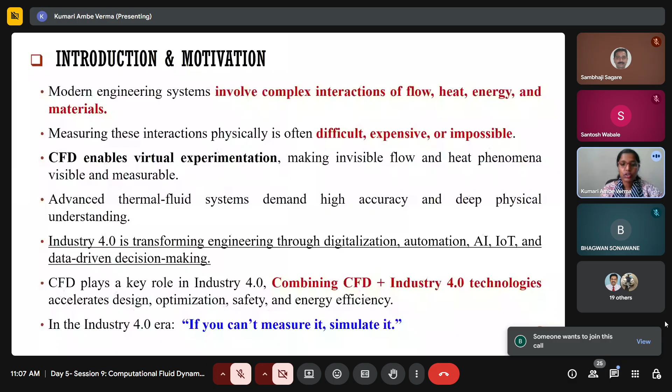So what we are doing here, we are talking about CFD, which plays a key role combined with Industry 4.0 technology that will enhance optimization, safety, and energy efficiency. So overall, one can say: if you cannot measure it, simulate it. One topic among many engineering problems is the thermal fluid system that manages heat and fluid flow.

So to overcome all these problems, there is a tool we call CFD. Many other tools are available, but CFD can be a hero for modern engineering. If you go back to the history of traditional design, earlier what we used to do was make a prototype, then analyze it and simulate it to get the result.

It was a costly and slower process. Modern engineering focuses on virtual simulation tools, making them with the help of certain software in a fast and optimized way. Nowadays people are connected with intelligent tools, nothing but AI tools, and digital twins are available. So we are now in a very fast and forward mode, combining with CFD.

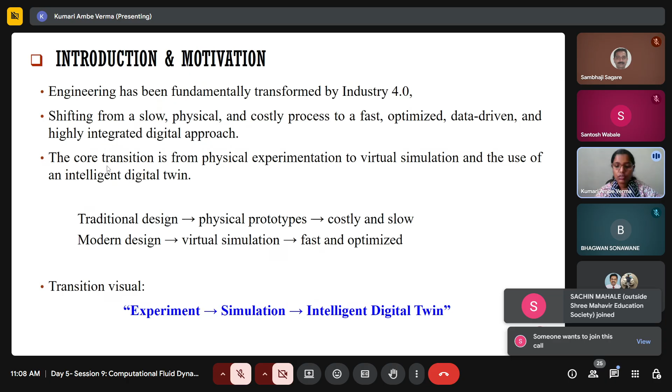We have to enhance our capacity in multiple tools, and the next coming Industry 5.0 will be all about resilience and sustainability. Still we did not reach there, that's why we are talking about Industry 4.0. So it's all about the introduction and motivation. Let's go for the little fundamentals.

It's not that complex. If you know a little mathematics, physics will be more than enough. So it is computational fluid dynamics, a branch of fluid mechanics where we use computers to simulate all the governing equations that utilize the basic fundamentals. As you know, there are three basic fundamentals.

We'll discuss that later. Before that, if you are aware of any tool that utilizes computation, it will categorize into three parts that you can see here: pre-processing, solving, and post-processing. All have different meanings. In pre-processing we always set the problem, in solving the computer plays the role, and in post-processing the interpreter visualizes the result.

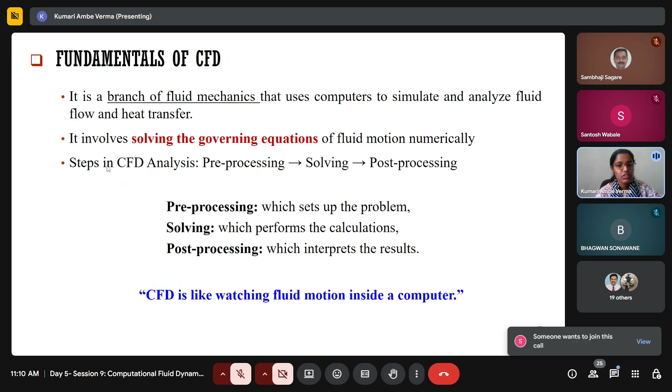So CFD is nothing but watching a fluid motion in a computer. This is a pictorial view you can understand. In the first segment we will design it, making certain changes in the geometry. We call it meshing, and then we give the initial boundary conditions and other conditions.

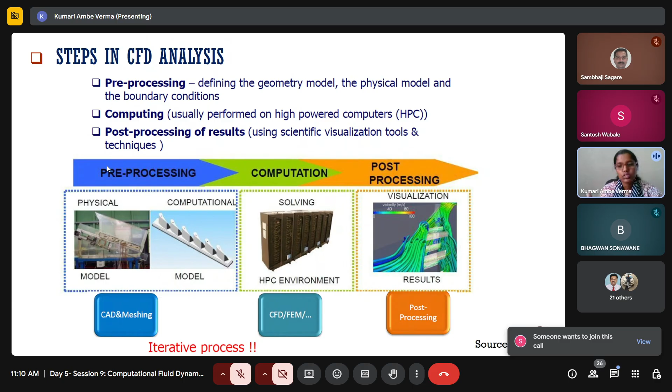In the solving part, the second in the middle, it's all about the computer part, where you tell the computer to use this equation, solve my PDEs, and then the computer will solve and give you the visualization in the result part. You can post-process with the help of multiple visualization tools.

If you see one very easy example I have taken, it is a one-fourth part of a circular disc. You can see first it talks about the build geometry, so what we will do is make one geometry form. Then in the second part we will do the meshing part.

People are aware of what is meshing, but we'll discuss these things. We call it grid generation, sometimes discretization tool. Names are different because of the meaning. So here you will do the small segment distribution.

You will do the third step: define the boundary condition and the set of domain conditions. Once you are done, we call it pre-processing. You pass the same information to the computer and say utilize this certain equation based on your demand, whether the domain is related to turbulence, combustion, multi-phase flow, or fluid structure interaction. All that condition you tell the computer, and it starts doing the calculation, converting PDEs to algebraic equations.

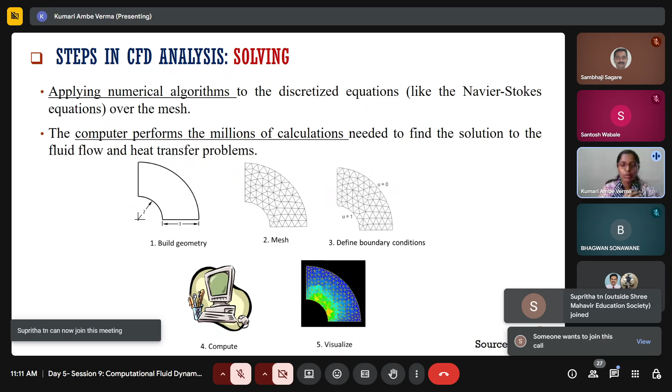Then the visualization tool is called analyzing and interpretation, so you can utilize multiple post-processing tools. This is the basic understanding of any CFD.

Now talking about aerospace, or the application, people might be curious where we can utilize CFD. There are multiple dimensions you can connect anyway. So if I talk about aerospace, starting with the aerospace segment, you can see I quoted one is DRDO HSTDV.

This is the scramjet combustor, my domain is related to that, that's why I quoted here. They are simulating it because we cannot make the high speed combustion analysis in the wind tunnel, and it is really costlier and difficult to analyze it. So we do the CFD analysis.

Now the other things: rocket, what pressure distribution is going on at a hypersonic launch vehicle, what is the wing body interaction, we call it fluid structure interaction, how it behaves in the combination of solid and fluid behavior, because at higher speed you cannot understand what is going on. It will not be normal like on land, and many more examples.

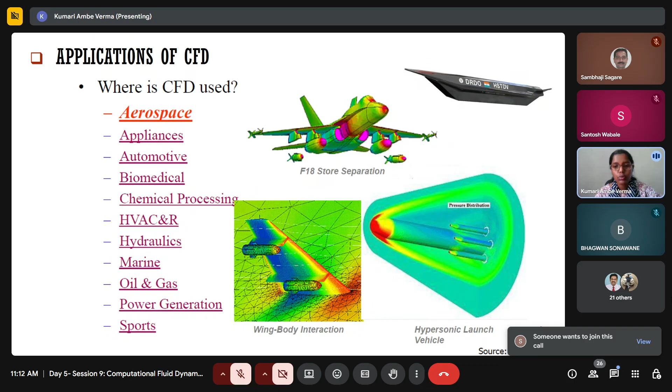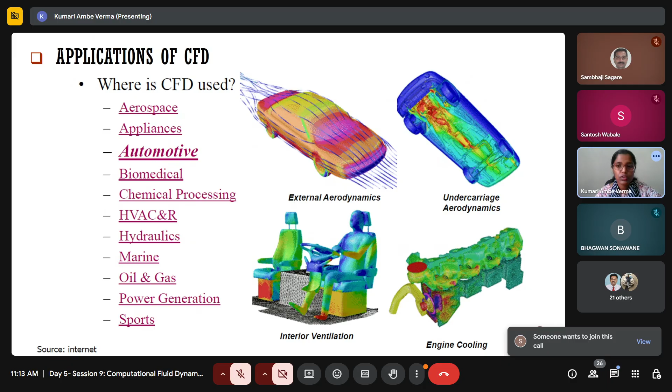Now this is more popular, automobile, people know. Automobile is a combination of internal external analysis. If you are talking about aerodynamics, the designing part, it's a different section. If you are looking for engine cooling, it is a different analysis. Similarly, interior ventilation is also one task, so that the driver or the people will feel comfortable while driving. So this also you can analyze here.

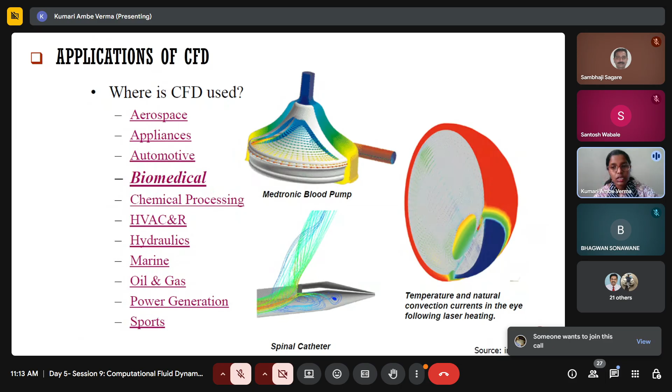Now talking about biomedical, people don't know, but mechanical engineering people always invest in biomedical. They focus on heat dissipation, cancer growth, everything we can analyze with this software. You can see one example, temperature natural convection. This is the eye cataract, where laser heating can change the behavior, can disrupt our eyes.

That also we can analyze in this CFD tools. And chemical processing, like how mixing will happen, what twin screw extruder we should utilize, what modes of flow we should take. These are all about chemical processing.

Go for HVAC, you are more aware nowadays. People are more looking for air condition, how you will keep it, what would be the size of the volume, how the duct will be designed so that efficiency will be higher, there would be lesser loss, because we engineers always focus on reducing the error, whatever the inefficient part, try to get 100% efficiency.

And hydraulic, it is really good example, because you can see there is a bridge where both side fluids are available, but there is one catch here. You can see the air also plays a role in designing this part. You cannot ignore the air, wind speed, and any disaster situation. So it's not only the one bridge standing in the middle of the water, or whatever the dam is, in the middle of the water streams. It's really difficult to simulate. For that also multiple categories we have defined.

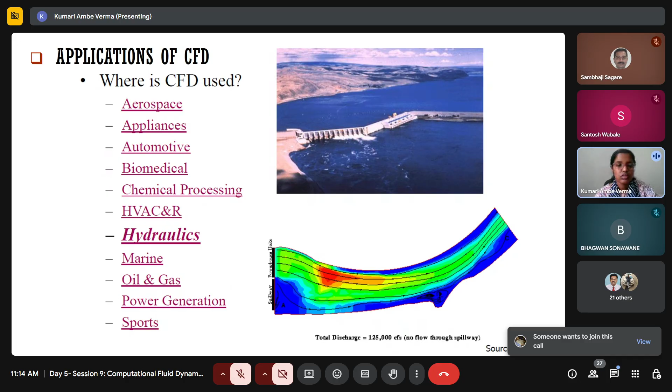Now marine is really big now. Ship hull is what people are working on, the front head, how to design it so that the drag will be minimal and the speed will be higher.

Similarly for oil and gas, you can see how you can make it possible, whatever pipeline you are talking about, how the flow vectors and pressure distribution work on the offshore oil rig. This category also goes for mining people. They make a drill in such a way that the life of the drill bit will be higher and it will be efficient also.

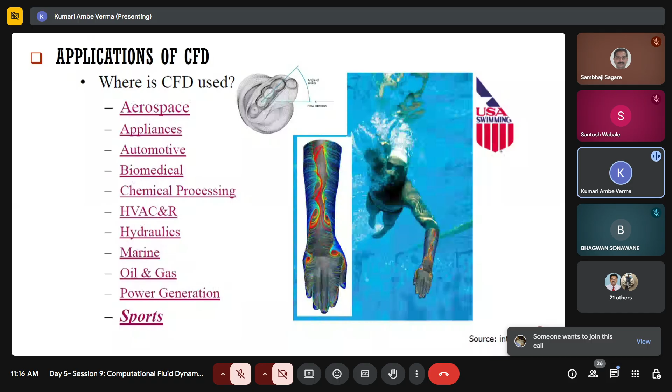So you can see here the understanding of the thermal fluid system. Now we are planning to talk about introduction and fundamentals of CFD, all about how the application will work, what are the domains, what are the three major sections: pre-processing, solving, post-processing. Now let's go for a little mathematics and physics.

As you know, any basic thermal fluid system definitely will take three major directions. First would definitely be the mass, second would be momentum, and third is energy. All are aware of this.

So we always talk about mass is conserved, momentum is conserved, and energy is conserved. In momentum, Newton's second law is the major thing, where the force will distribute it, whether it's pressure force, weight force, whatever type of force we are talking about. So all the fundamental physical equations will help us understand, then we choose our problem and add the additional equations we need, then we give it to the system. The system will simulate my problem.

Now, being a mechanical engineer or engineer, you must be aware of these two words, Eulerian and Lagrangian approach. This is all about how you analyze the problem, whether you are standing and the flow is passing, or the second condition, you are passing with the flow stream. So these are two major approaches, Eulerian and Lagrangian, where we can say the particle is standing or traveling with the fluid motion.

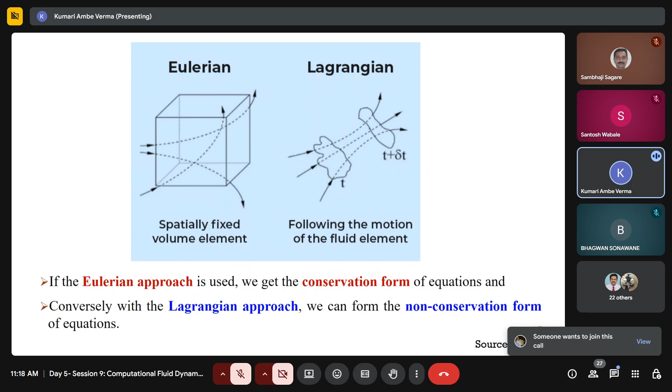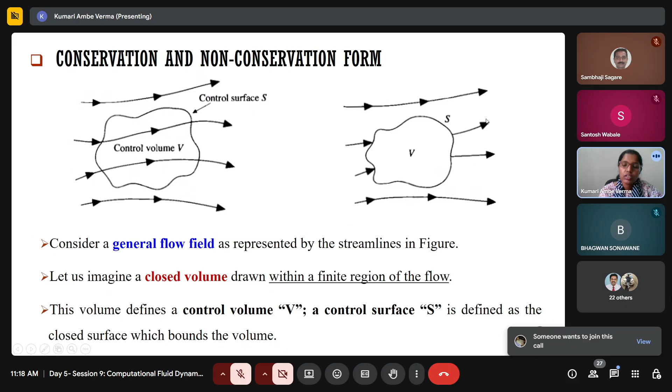In CFD, we call it conservation form and non-conservation form. We never say Eulerian and Lagrangian. We say the control volume term, we say the control surface term, where the picture directly shows you: in the control volume, it is fixed and the streams are flowing. We call this conservational. Here you can see the particle is moving through the streamline, whatever that streamline is - it can be heat flow, fluid flow, anything. So this is all about conservational and non-conservational.

Here we never say Eulerian approach and Lagrangian. People talk about the fluid particle trace and the control volume trace. So here we'll say: the flow model which is fixed in space is conservational form. The flow model moving in space, we say non-conservational form. This is a keyword you must know while doing the analysis.

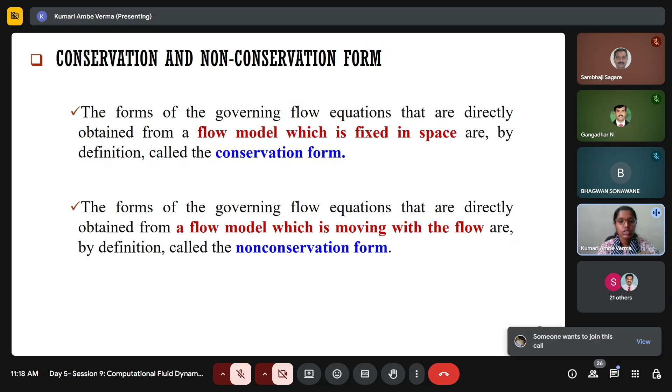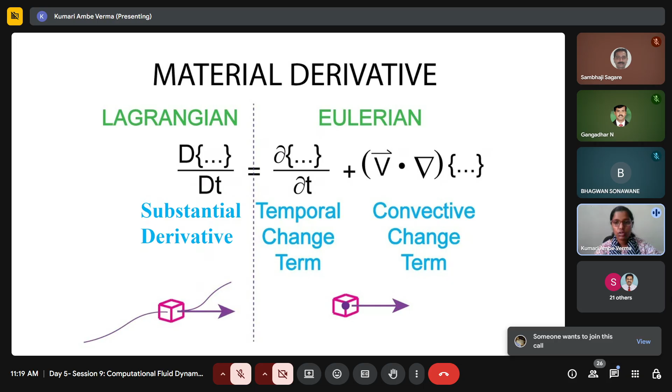And now people will ask how we can connect both. So there is the material derivative already available in mathematics that connects the Lagrangian and Eulerian together. In Lagrangian, we utilize the substantial derivative, and in Eulerian, the temporal change and convective change terms are involved. And you can understand it through the picture - all these pictures I have taken from the internet, it was easy to understand.

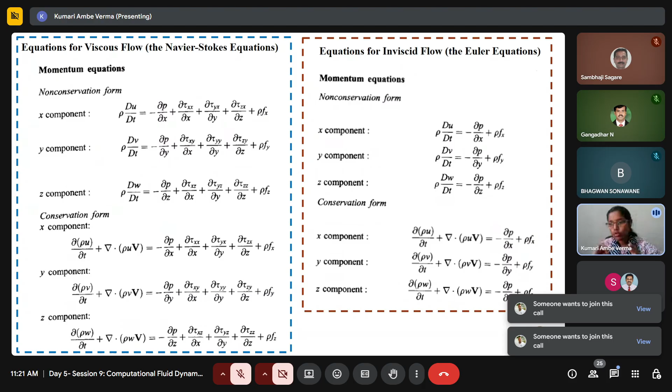Similarly, you can see the non-conservational form on top. These three equations utilize the material derivative in combination of both. So there is no difference in the mathematics - it's about how you represent it, whether you are tracking the particle with the flow or you are fixed and watching the thing. It's all about: you are in the boat, and the boat is flowing in the water stream, versus you are standing at the bridge and looking at the particles. So it is like in this way.

Similarly, for the energy equation also, there is the inviscid and viscous flow, where you have seen one term - E and V squared by 2. Energy can be in any form.

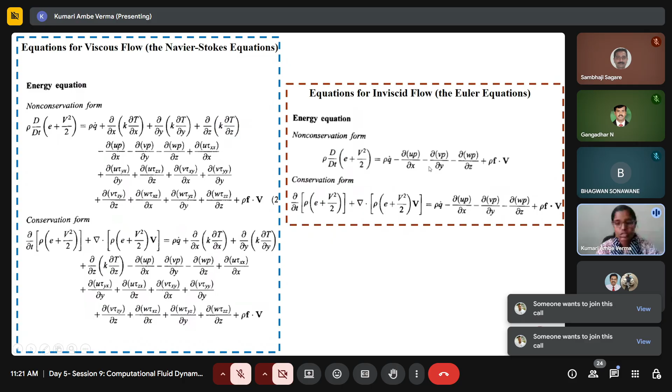In the fluid thermal system, we focus on internal energy and kinetic energy, and these terms are segregated. All the internal generation and effects are on the right side, so this is conservation, non-conservation, and conservation form. One catch: it's inviscid, so you will not see any tau or stress term in the equation. This is the basic equation you must understand before heading into CFD. If someone tells you the governing equation, we call it the fundamental principle: mass is conserved, Newton's second law means momentum is conserved, and energy is conserved, where all terms are important.

To use this equation, you cannot give it to the computer immediately; you have to give it in a discretized form. Why discretized? Take an example of a room where you want to calculate the temperature at the middle. How would you calculate it if you're given only two boundaries? So we create multiple imaginary boundaries and small segment parts, called a discretized form, so we can understand each and every location. The equation will be calculated without jumping, so you can calculate each and every place. So in CFD, it is the art of replacing the PDE with an equation in discretized algebraic form.

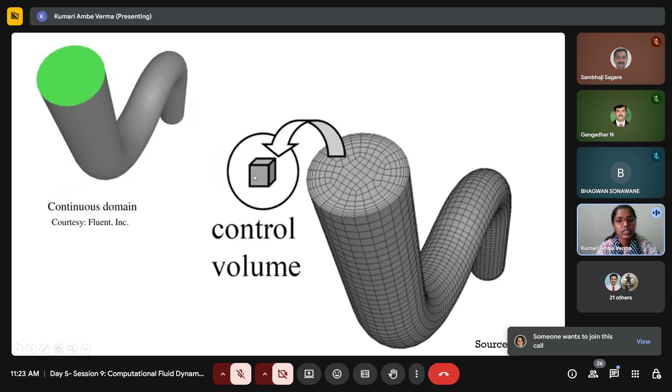If you imagine a pipe flow, this is a normal continuous domain. You try to make it into small segments, which we call a control volume. In this control volume, we give all the governing equations, and that will pass the information to nearby volumes, and it will reach the end of the domain. Then it will give you the final outcome.

One thing you must be clear about: whenever you use any CFD tool, it will definitely give you a result, but it's not always true that you are getting a correct result. For that, you must understand whether you have coded all the data properly or not.

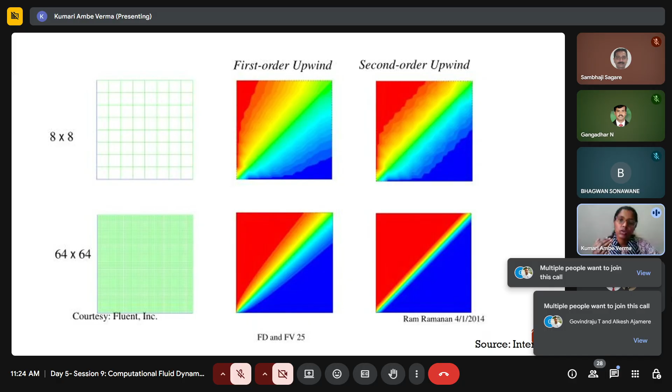So you can see the difference just by increasing the grid; you can see different kinds of results. So which one is correct? How would you analyze it? By the discretization methods and the validation part.

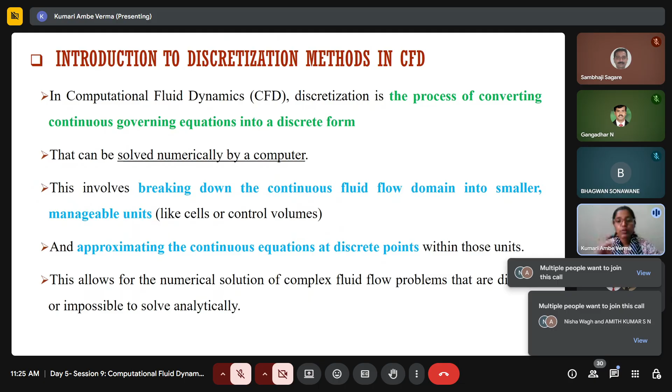So what is the need of discretization? It deals with converting the PDE to a discretized form that the computer will solve, and then you can transform this PDE and also apply multiple stability techniques, which we'll discuss.

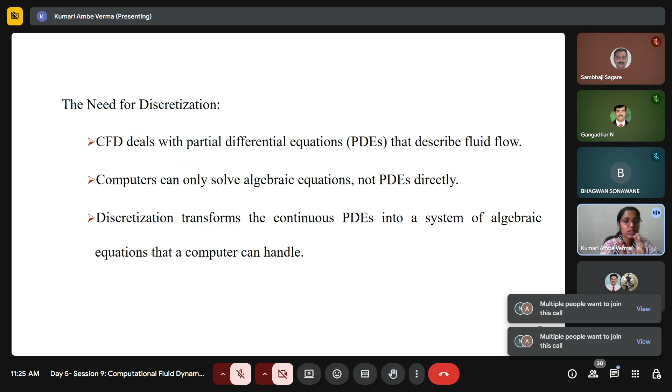So now you can see, you're thinking about some equations, some problem — that's all about the analytical equation. You make it into a discretization form, and then the problem will be solved by the computer. So discretization can be of three types: either finite difference method, finite element method, or finite volume method. How would we decide these things?

Based on your problem statement, whether you are talking about composite material, combustion, high speed, or thermal related issues, you have to decide the problem, then choose the discretization technique. This discretization technique will pass information to nearby elements. So how would you decide?

What you will do is discretize into multiple segments so that you get nodes and corners available. Once you ask the computer to give you this node at this point, it will give you the intermediate result, which is not possible in a real world experiment. You cannot predict what is going on, how the combustion has flowed, how the blast has happened.

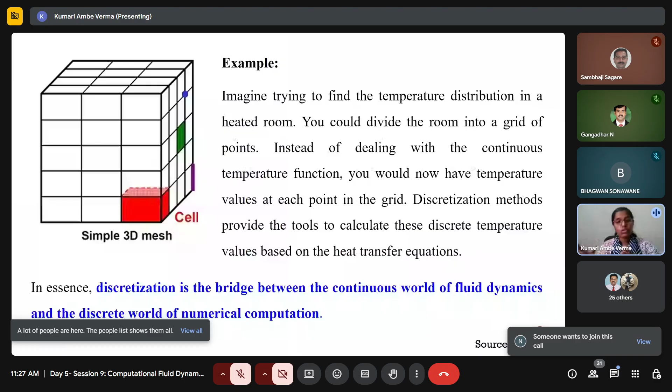Recently the Ahmedabad blast happened, and no one can understand it fully. They will simulate the same situation, trigger it, and try to get information on what was the cause of the problem. So this is all about discretization. How would you discretize? That will bridge the gap between the continuous world and the discretized world, making it into a singular, small segment.

So here there are three modes we can use: FDM, finite difference method; finite volume method; and finite element method. In all these cases, you use them to approximate the solution.

So how would you do it? In all cases there would be a control volume. You define it, then analyze it. If I'm talking about finite difference, people always choose it when they are more focused on the approximate solution related to difference approximation or a structured way, like any simpler structure, you can go with finite difference.

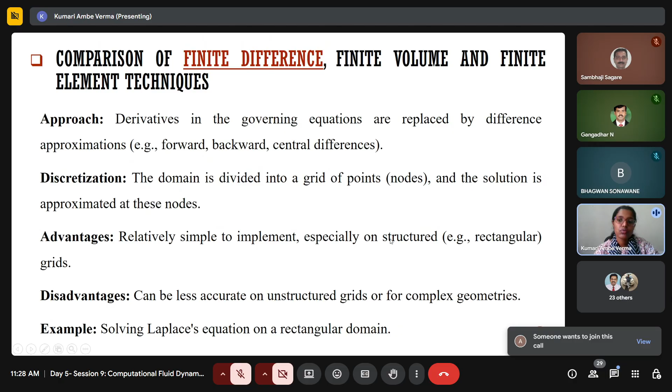Now if I'm talking about finite volume, it is really popular. Here we can solve any kind of domain, small region domains very easily, mostly fluid flow and heat transfer simulation problems. So FVM is really my favorite because I have worked on it.

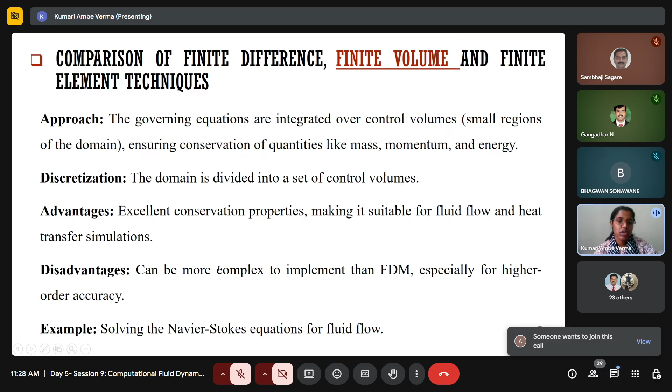Now if we compare with finite difference, finite volume is somewhat related but really complex and time consuming, though it gives a really good result. Approximate accuracy will be really good compared to others, and it solves simultaneous equations also.

Now the last is finite element technique. Here we define all the domain, but it always handles complex geometries or where mesh densities are really important, so it is really expensive but gives a really good result. Mostly people working on analyzing stresses and strain in mechanical structures use finite element. In ANSYS Fluent also you will see one domain called mechanical, where they made a separate section for the finite element technique.

So till now we were talking about discretization, why we give a small segment to solve the problem, but no one has talked about what type of division we should do. It's not always possible that you get a rectangular form of a very small, simple structure. It may be abrupt also.

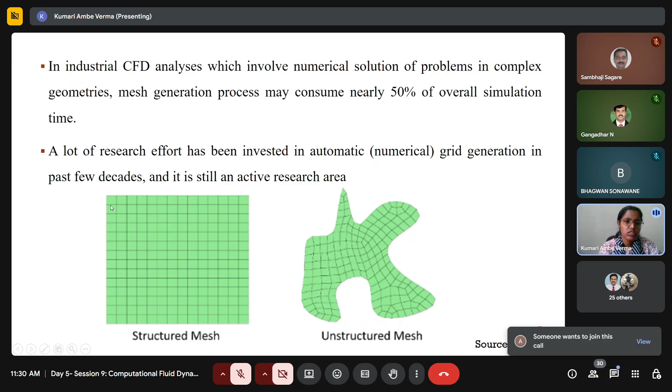Structured mesh will look really finer. You can see the difference between structured and unstructured; an abrupt example I have given. So grid can be structured or unstructured, and many more divisions are available.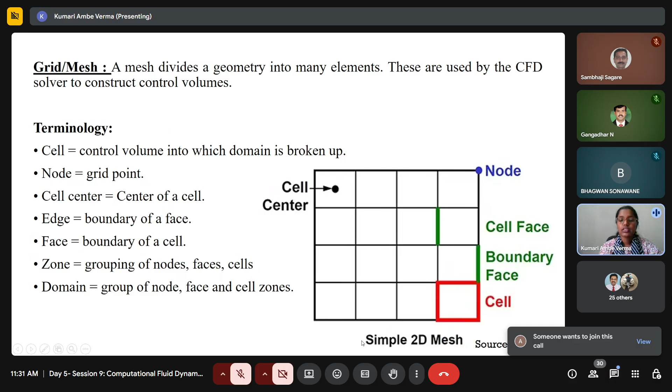Now talking about 3D, the cell will look like this rectangular form. Here you will experience one extra word, that is edge, and the face boundary will be in 2D. You can see the nodes are here, these are the cells, this would be the cell center.

So you must understand the terminology, because while passing the information, whether you are keeping your equation at the cell, at the edges, the cell vertices, or whether it is passing staggered, this will change based on the selection of FVM, FDM, and FEM. How you are choosing will change everything.

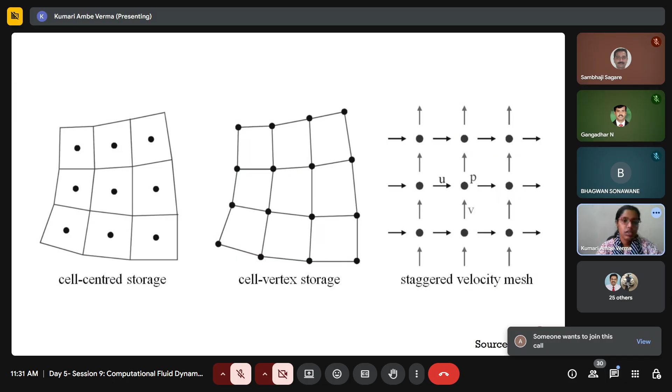So if someone will ask what points we should consider while doing the meshing, you should focus on the resolution. Don't go for unnecessary complex meshing, whatever is needed, do it. Use types of mesh based on your application, and always go with your computer resources. Based on the software license and computer resources only, you can do it.

So for 3D and 2D type meshes, it cannot always be quadrilateral and hexahedral. It can be tetrahedral, pyramid, triangle, prism, any arbitrary shape. Polyhedral also can be a mesh type, that grid type that you have to decide.

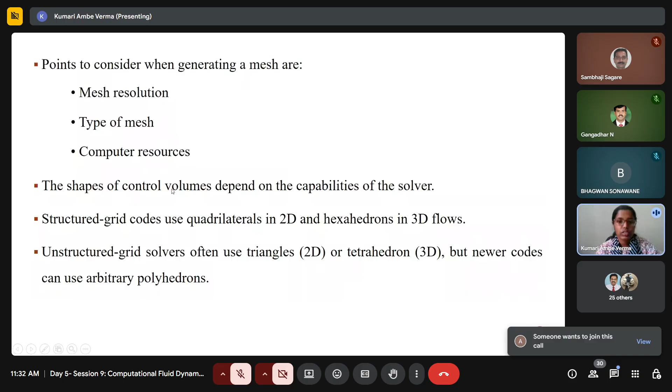Imagine I am standing here passing information to this straight 2D geometry, you can understand. Now imagine we have one grid here, and nearer to this grid suddenly I got a prism. What will happen? The center of the cell is here, and here the center will change, and information will be compromised. So that will create an error.

That is really important. That's why multiple engineers only work on the meshing part. There are separate sections for geometry generation, separate sections industry always focuses on mesh generation, because that will change the outcome or the result.

So types of grid: starting with structured, unstructured, and certain block structures also, and certain specific aligned flow structures are available. If I say the structured grid, it is also having multiple segments.

So excuse me, slides are changing.

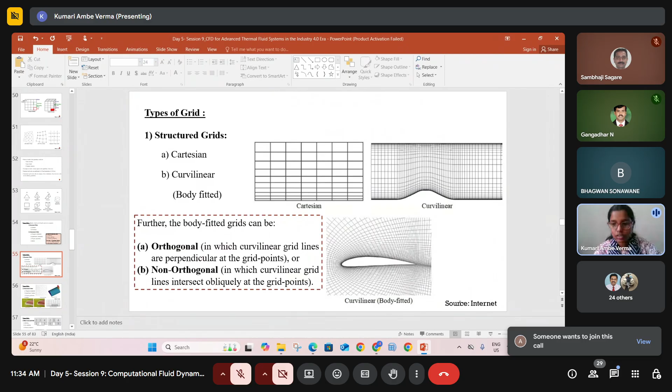Am I audible? Hello, yes ma'am, you are audible. Okay, the slides are changing or stuck, I cannot move it now. I think it's stuck. Can you stop sharing my screen? I cannot do this part, there is an issue, I'm so sorry for this. Can you see the screen now? Yes ma'am, okay, sorry for the interruption, I'll share again.

So let's go for the types of structure. Starting with the structured grid, it will have two major components: it may be Cartesian, it may be curvilinear.

The curvilinear is all about the body fitted. Whatever structure the body has, we will focus on that, and then we will refine the structure. It will not be Cartesian, it may change the shape.

Similarly, these are the most popular curvilinear examples. This wing you always simulate in the system. So that can be divided, it also comes under the structured grid.

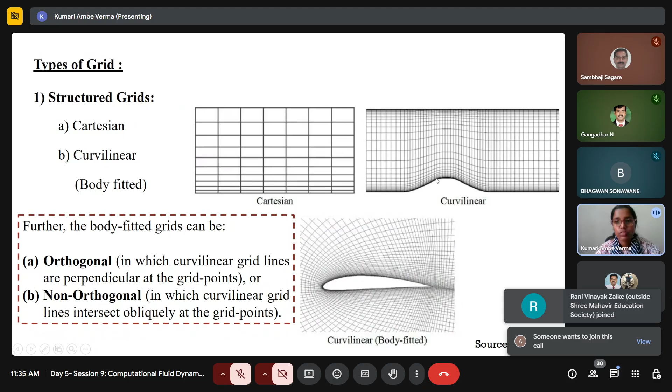So you can change the meshing wherever the target area is. If imagine I am focusing on that part, why would I invest energy and cost of the simulation elsewhere? So make it accordingly, whatever the domain demands.

Now go for the unstructured. It can be arbitrary, you can say polyhedral, tetrahedral, hybrid, anything.

Whatever the domain or demand is, whenever you see the joints, it is really important to focus on whether the information will be passed properly or not. That can be triangular, quadrilateral, polygon, or hybrid. You can choose any, and this is really important.

This block structure that people nowadays use divides the geometry with an imaginary line. What does that mean? Imagine my focused area is the 1, 3, and 5 number regions. I'll not refine the 2 and 4 sections, I'll only refine the first, third, and fifth sections. That can be done with the broad block structure, again matching, non-matching, and chimera, which is all about the composite combination of all. So these are the types of structure you must know.

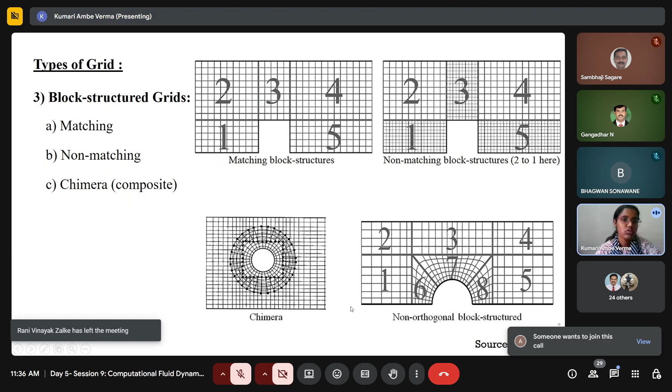What we have done here is make a geometry, then create a small meshing or grid generation to give the proper information to the grids, which can be utilized with the discretization technique, either FVM (finite volume), finite element, or finite difference method.

Now you know your boundary condition, whether you are working for high speed flow, combustion, or only turbulence, or extremely low speed flow where the Reynolds number is really low. These are the initial conditions you will define to the computer.

Now imagine you are ready with these three. What about the computer? How can the computer solve multiple equations, like three governing equations plus any additional equations you have given? For that, you have to give a command to the computer about which kind of numerical scheme you want to utilize. Like in second year mathematics, we already studied the Runge-Kutta method or Gauss elimination, and many more methods are available. So now we'll talk about the available solver that will solve all the PDEs, converting them into algebraic equations that are discretized by any method.

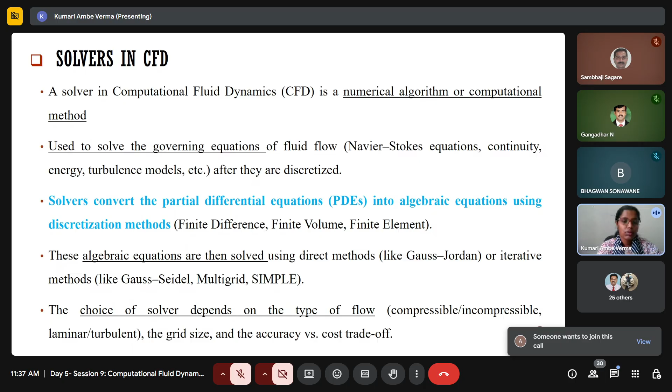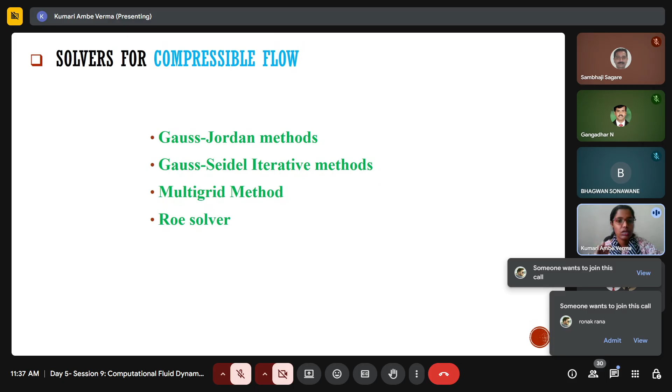There are multiple small segments you must understand here. If I talk about two cases only, compressible and incompressible. For compressible, I have quoted four: Gauss Jordan, Gauss-Seidel, multigrid, and Roe solver. Based on your demand, you will choose one.

Now imagine you are choosing the Gauss Jordan method. It is a direct numerical method, not iterative. What you can do is perform elementary row operations. You will create a matrix, solve it, and get the linear algebraic equation. Then you will solve it with the row and column augmented matrix method. It's a really easy Gauss Jordan method.

Now go for the iterative method. This is the Seidel method. It will give an iterative solution for the same linear equation and try to reach up to the exact solution. Not possible, but we'll try to reduce the error percentage.

Now if you are talking about the multigrid method, why should we choose multigrid if all the iterative methods are available? Because it is very good for convergence. Convergence means you have taken three equations and are solving them together. It should always be within a certain error percentage, it cannot be beyond this high frequency error. You have to define how much error you will accept. Like industry or researchers always go for 5% maximum error percentage. That convergence is really important, and it would be rapid because of their solution technique.

Now the Roe solver is really popular. These two are really popular in compressible flow. This captures the shock and discontinuities also, so it is also an approximate solution.

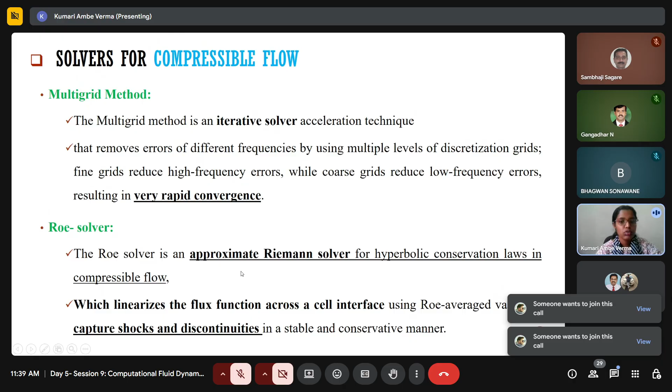Now talking about incompressible flow, most bachelor students focus on the simple algorithm and the vorticity stream function formulation. Why? Because in the iterative method, we always couple velocity and pressure. The simple algorithm couples the pressure and velocity, and then we formulate and solve it. Because of that, if the point is focused on velocity, the pressure variation will also affect the velocity. So that can be satisfied only by the simple algorithm. It is very good for incompressible flow. You can go for compressible also, but you have to focus on other criteria.

The vorticity stream function is also one mathematical approach. You focus more on the vorticities, the small curl of velocity you always see in the domain, that is the function. So the selection of the solver will change the result. It's a simple example: you know the pathway to reach from your company to your home, or from your institute to your home.

There are multiple paths you can utilize, but you have to choose the optimum one where you can reach faster, less costly, and give a proper efficient result. This is nothing but the selection of the solver who will try to convert the PDE into the algebraic equation with less error percentage.

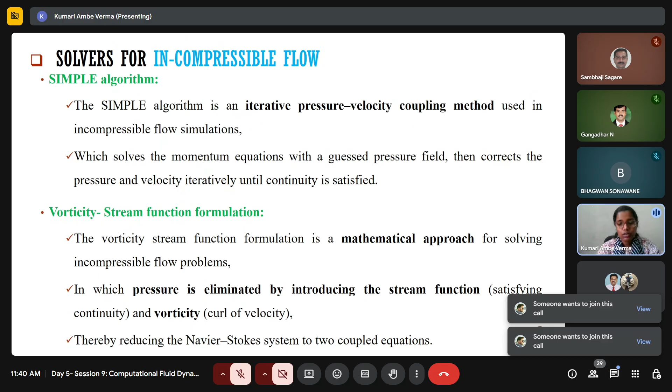So what we have done: we made a physical element, did certain grid generation and mathematical modeling, then converted it into an algebraic equation and got the numerical solution. Once we compared with the analytical solution, there was an error, and that error we have to justify with the comparison chart, which we call the validation part. It should not be beyond 5%.

So how can we reduce this error percentage? There are multiple ways. If you are standing here taking information from nearby points and passing the information, it can be in both modes. Two modes are available: either the explicit mode or the implicit mode. Both will solve the problem.

In the software you'll see a section where you choose whether you want the explicit approach or the implicit approach. If you choose explicit, and you're planning to get the information for point 3, you take the information from the back end, the 2 to 4 line. These are the known data you utilize for one unknown data, and you do it one by one. There is no simultaneous information passing by the system.

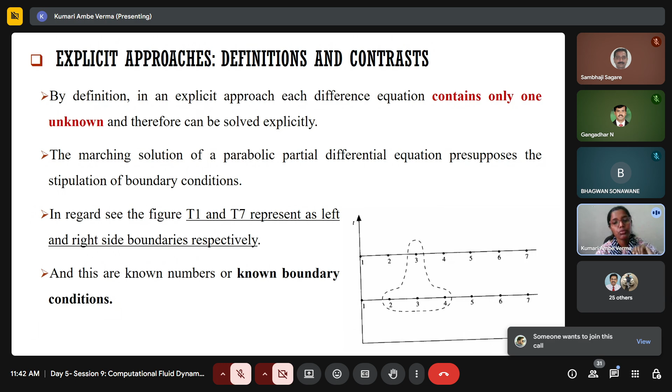But if you talk about implicit, and you plan to calculate point 3, you take the information from the backside, but simultaneously you also give information to 2 and 4. So its unknown must be obtained by means of a simultaneous solution. In the earlier explicit case, you contain only one unknown and three known parameters. So you choose the approach, whether explicit or implicit, based on how the information will be passed. This is one more section.

Now, how would you do the comparison? This result I have taken from my paper. Imagine you have one geometry, you discretize it, and you make a plot — take an example of a pressure plot at the wall. You can see the black colored dots; these are the experimental data. The multiple colored data are other kinds of models — these are the models I told you that you will choose.

What is the target domain? There are multiple meshing categories available. Based on your domain, you can refine the meshing further — so do a rough meshing like this and go further. This is one way. Validation is really important in any research or academia; people must understand this part.

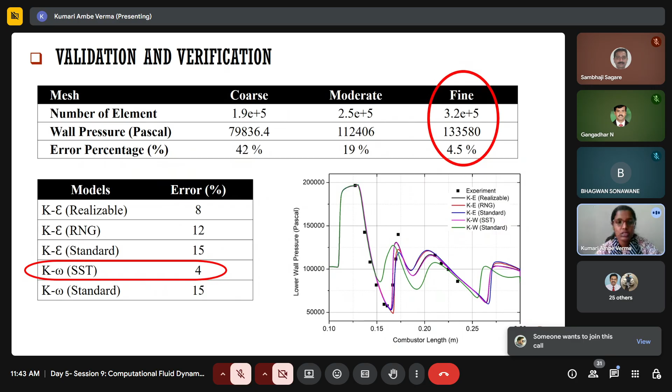So now we are done with understanding the thermal fluid system. Now we'll talk about how to do advanced analysis with CFD. Nowadays in any thermal fluid system, we always say fluid is flowing, heat transfer, heat dissipation — but the real challenge as an engineer is turbulence, which we cannot capture properly, either experimentally or via simulation. So what we will do is try to understand this chaotic, three-dimensional, wide-range length and time scale phenomenon.

There are DNS software and multiple software techniques available, but these are not needed right now, because first you should understand the mathematical representation — which technique to choose — because when you open the software, you'll be confused. There are multiple options for turbulence modeling: Reynolds time-averaged conservation equations, maybe the Boussinesq approximation, maybe two-equation models like k-epsilon or k-omega. People go directly with k-epsilon or k-omega without thinking about the basics. So this is all about turbulence — how to choose the model based on the classification of the problem.

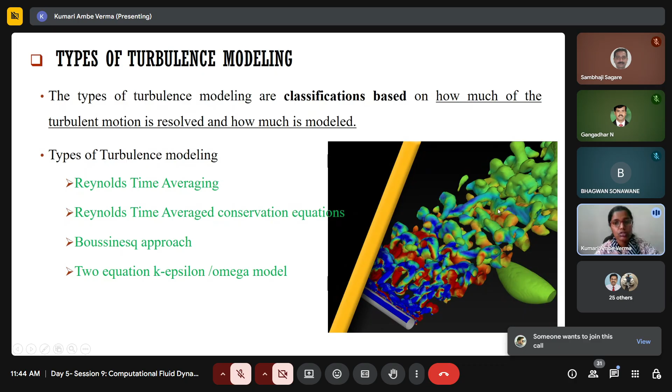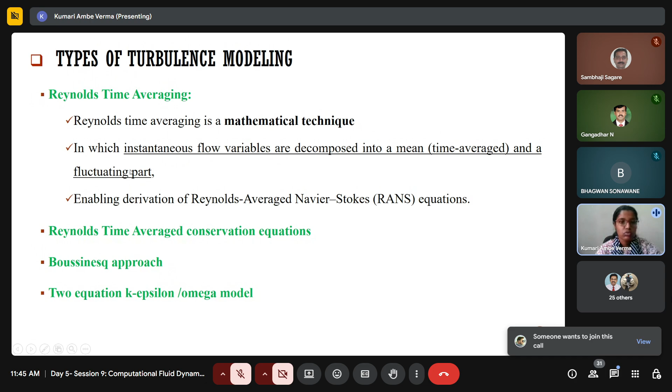If you are choosing the Reynolds time average, you must say I am only focusing on the mean, that is time average of the fluctuating part, the vortices. If you are choosing the Reynolds time average with the conservation equation, that means you are more focused on the Reynolds stresses also. So what are the points you wanted to trigger in your simulation? You have to choose accordingly.

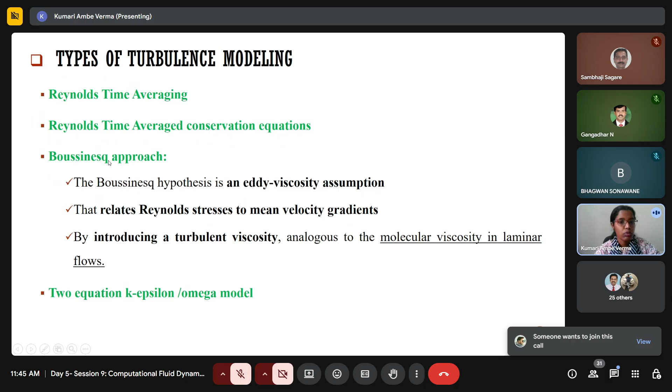Now the two equation models, K-epsilon and K-omega, are really popular to capture the eddy viscosity, because you are incorporating the kinetic energy and dissipation energy terms extra to the computation, and that we will solve. You already feed three equations: mass, momentum, energy. Further equations you add based on your application, like for combustion you add the species equation. Now if you are more focused on the eddy, you add two more equations. So in total you have five equations that will solve for one particular point, and then pass on to get the final result. So it is costly, you can say time consuming. Choose your modeling accordingly.

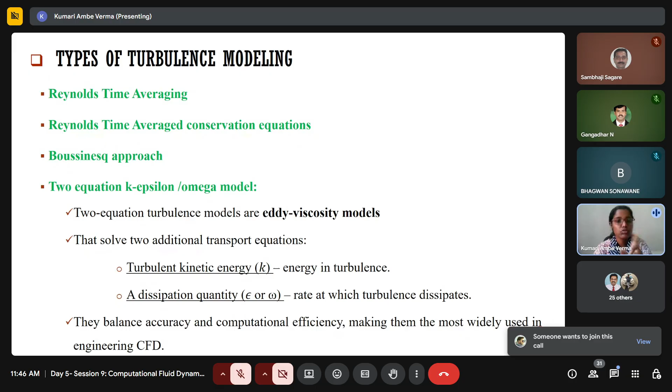Now let's talk about few tools. People ask, when should I go for ANSYS, when should I go for MATLAB, when should I go for COMSOL Multiphysics? If you are working on FEM, go for these platforms: Abaqus, SolidWorks Simulation, Nastran, and SimScale which is nowadays really popular. You can use these things.

Now if you are more focused on flow analysis, definitely go for OpenFOAM. This is open source software, you can use it without any licensing, but it is difficult to solve because it has its own library you have to trigger. Now ANSYS Fluent is really user friendly. SimScale is also popular in FEM.

Now talking about FDM, people make their own codes and take data from certain libraries, and MATLAB is really popular for this. Many more softwares are available, you can choose whatever you want. Only the display and UI will change, the interface will change, but the basics remain the same. You have to focus on pre-processing, solving, and post-processing.

So now talking about this CFD advanced analysis, I have taken only one equation, that is turbulent. Now let's go for CFD meeting industries, how people are more focused here, like CFD studies and real world applications.

Now take one case study: electric vehicle battery cooling. Nowadays people are more focused on this because of overheating as well as safety and efficiency issues. So which approach you will utilize, and why, whether you are focusing on the velocity or flow field, or on the coolant channel, what are the domains - do it and then analyze it.

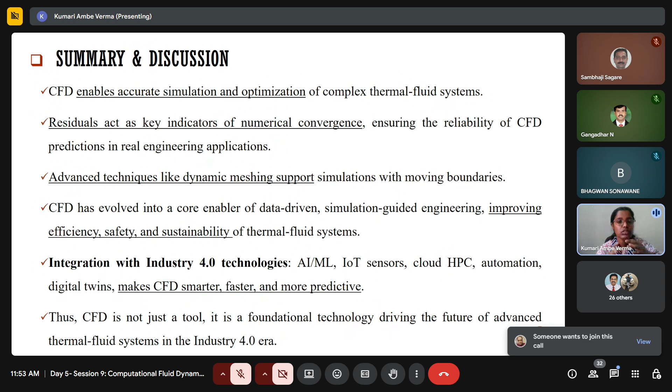So in summary, we started with multiple segments about introduction - how you should know what domains are available, what are the particulars, what are the problem statements. Then we went to the fundamentals, which equations play the role - don't ignore the mathematics part, don't only focus on one box. Any tool is a black box like a calculator - if you give a wrong command, it will give you a wrong result. You must understand the physics behind it, what equations are available, do proper meshing, give proper solver settings, then you can get the proper result. So this is the summary of all the discussion we have made here.

So this is the beauty that CFD can give you - it will give you visibility to the invisible. And with Industry 4.0 tools, that can reduce the timing effect, and computer speed consumption can increase because of quantum computing coming into the picture. People are learning these also, so that we can speed up the solution part. If that happens, we will be on the winning side. So complex mathematics can be solved in a user-friendly way, you can utilize it.

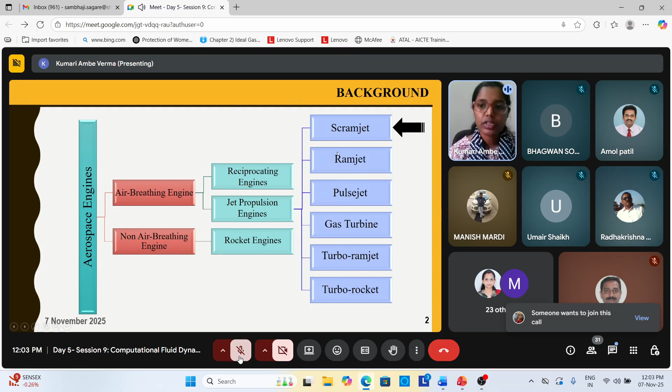Okay, so my talk is all about the combustion of scramjet. You can see the subsection starting from aerospace engines. It can be two types: air breathing, non-air breathing. Air breathing can be reciprocating or jet propulsion. In jet propulsion, multiple categories are available. So we'll focus more on scramjet.

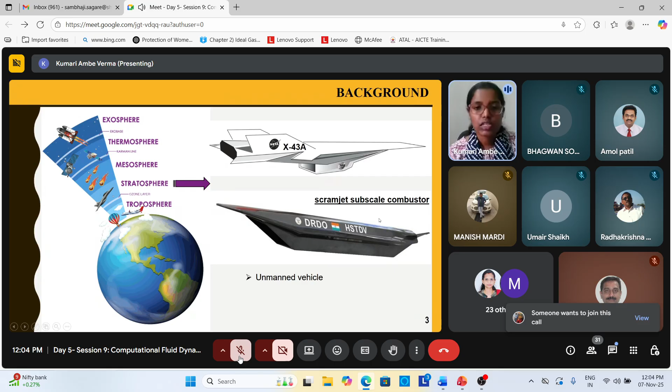So you can see two images, I guess. The DRDO, for this high speed combustor, they have made a trial also, subscale. Here also you can see NASA has tested it long back, but the thing is these are all unmanned vehicles. There was no human involved in either the images or the engines, all are subscale. What is the meaning of subscale? A very small scale, not the exact aeroplane size, a very small scale. People have tested it, and recently DRDO successfully did it at high speed, lasting 25 seconds or more, I guess 2 minutes.

We take fuel, mix it with air, combust it, and thrust will be given to the engine or whatever the payload, and then it will run. For that reason, you will be at high speed. Imagine what will happen: air will enter inside the engine, you mix it, combust it, and the heat dissipation from it will throw the engine forward.

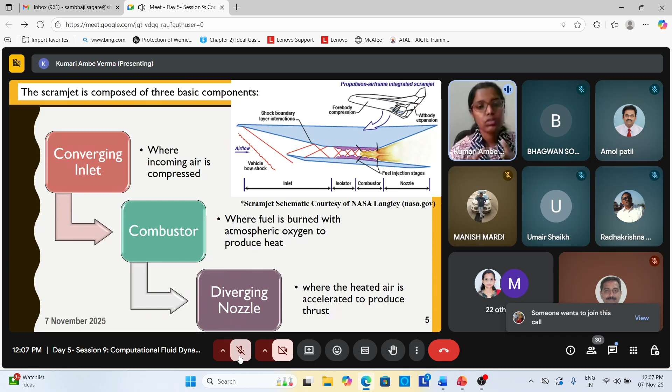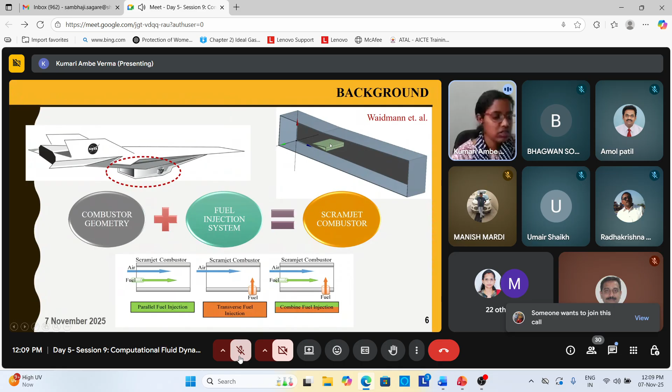That design also plays a role, but design cannot be compromised with the material part - you have to focus on material heat dissipation as well. So across multiple literature segments, you have to compromise. You have to focus on large-scale vortices too, whether the fuel or flame is holding inside the combustor, whether the angle you have created is favorable to capture the shock or not. In total, you have to focus on multiple categories: geometrical modification and fuel entrainment strategy.

Now imagine this geometrical formation you made - there has been multiple research done by changing the geometry design, changing the combustor wall angle, and additionally creating disturbance. So now we will focus more on the fuel entrainment, how we can change the fuel entry so that it can be consumed properly, or combust properly without giving more emissions.

So you will see an image, the same image made in 2D form. Here it is made in 3D. Imagine this is one kind of geometry, made in 3D. In between there is a strut arrangement.

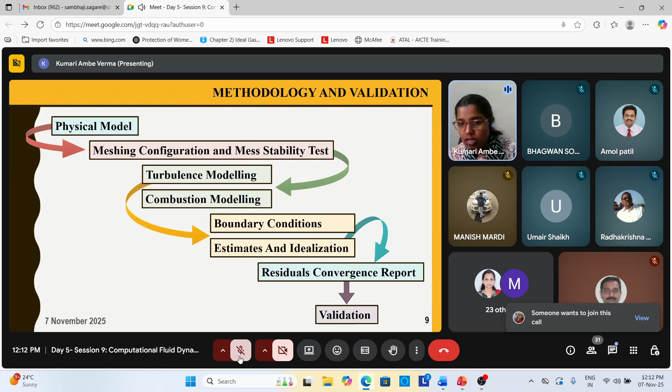So in total, how many equations do we have till now? Three for the basic set. Turbulence gives two more equations, and one equation for combustion. In total, we get six equations solved simultaneously by the computer for one single cell, and that passes on to get the result.

What I performed initially was the meshing part - I did coarse meshing, then moderate, then fine. Among them I identified it showing 4.5 percentage difference, and this is the turbulence modeling I chose, K-omega SST.

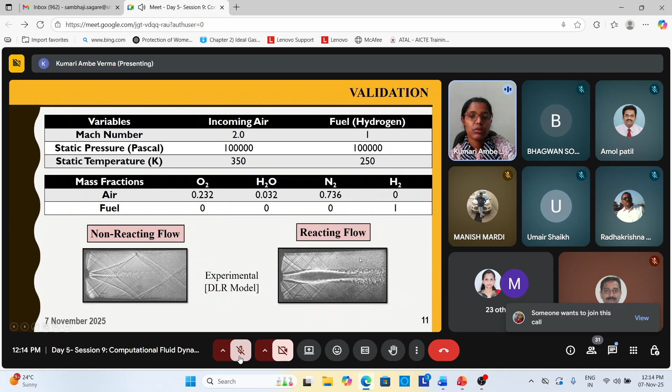Now imagine you cannot only give one dimension for comparison, you have to focus on the contour plots and image plots also. This left image is non-reactive and this is reactive, taken from the model that a German researcher has done. I took the same image, and you can see once it hits, it created multiple shocks, and then mixing happened. Now what is the difference between non-reacting and reacting? In this case combustion has taken place, in this case we are only talking about the mixing part.

So you have to do the same thing with the plot part - you will create multiple lines in the middle.

What are the temperature variation at the wall, what are the temperature and velocity variables, how it will behave in this simple pipe flow. You will see there would be a parabolic nature, but what about this case where the high speed flow are involved?

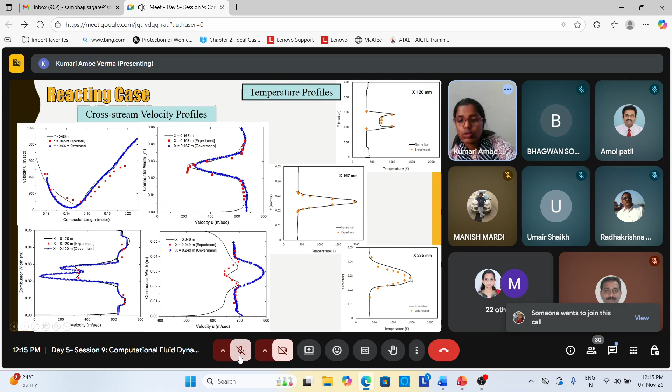And this is the temperature variation. All are having constant temperature, but once where the combustion has taken place, you can see the temperature variation at the peak, and that too 1500 Kelvin. And this is all about non-reacting where the reaction has not taken place, but the flow is really extremely high, so that also will change the manner. You can see in both the cases.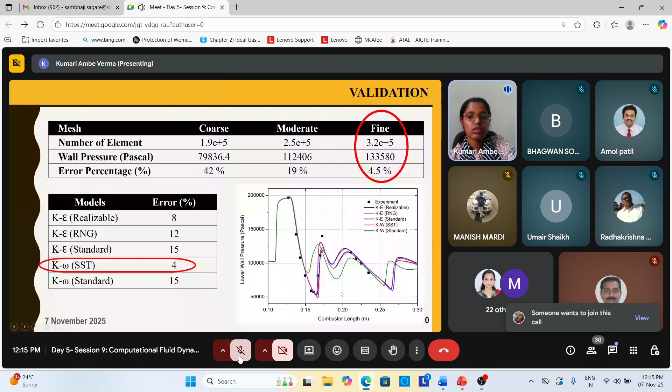So this is for the reacting cases, this is for the non-reacting. These are all about the validation part. You cannot compromise with one line only, just taking the bottom wall and keep it in this way. You have to consider all the dimensions, and then you can plot the graph. And in all the cases, whatever I have shown, shows less than 5% error.

So now, if you are done with the validation part, you are done with the geometry selection part, you give a demand to the computer and it will simulate based on your solver. So now imagine for the compressor you had taken multigrid or ROE, what will happen? It will give you multiple results, multiple dimensions.

So my categories were Mach number distribution, pressure distribution, species distribution, temperature distribution, and combustion characteristics. So you can see the geometry. The air has entered in the geometry. You can see the blue color. That means there's no variation in what we call the Mach number.

Now here once it hits the corner, definitely it will create a shock wave. So shock waves have multiple types: shock wave, normal shock wave, oblique shock wave, and mini modes. So once you will see the tip, then immediately one inclination has happened, hitting the walls. Hitting the wall means in normal it will always be at 90 degrees. Here it is at an angle, we call it an oblique shock.

So once it changes this property due to the oblique shock wave, you can see the variation. The value of Mach number has changed. Because of the Mach number, pressure will also change. And you can see here, sudden Mach number reduces up to very slow. That means a stagnation situation has also occurred.

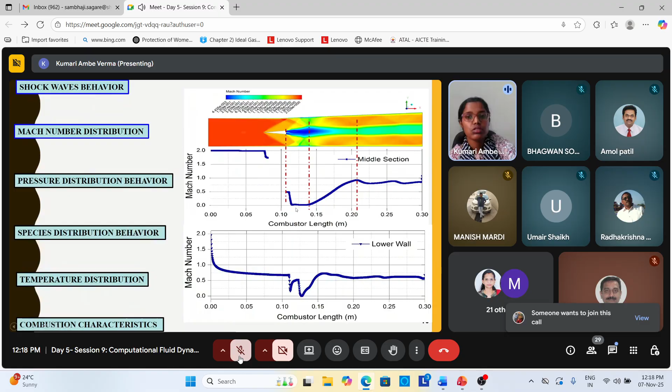Extremely lesser means due to the favorable situation, it was lesser, nearer to zero. That means you can mix the fuel with the air very nicely and the combustion will take place, and that thrust you can utilize for further movement.

Similarly, you have seen this blue color and the Mach number reduction, you can see because of this recirculation zone. And these streamlines are following the same pattern. Only the recirculation zone was the important parameter that changed the behavior in front of the fuel injector.

So if I wanted to look at how the fuel has entered, that is hydrogen, inside the domain, it will start mixing with the air and then give a stoichiometric ratio, combust it, and pass the information. So this red color you can see, hydrogen has entered at Mach number 1 and then reduced up to 0. That means efficiently mixed with the incoming air and giving proper information, and we call it a mass fraction distribution throughout the control domain.

Similarly, you will look for the species and temperature distribution. Once the combustion takes place, there's a sudden peak of temperature maximum, you can see it reach.

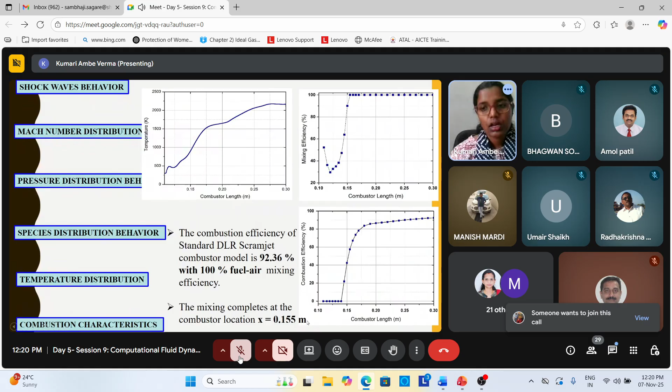Away from the injector, it starts mixing and flowing at 150-160 mm of the combustor length. 100% mixing means all the fuel has been mixed properly, and the combustion efficiency you can calculate comes to 92.36 percentage, and the maximum mixing has reached at 155 mm of the combustor, starting from the inlet to here.

Now, what I said, you have to compare it first with the experimental data that we have done.

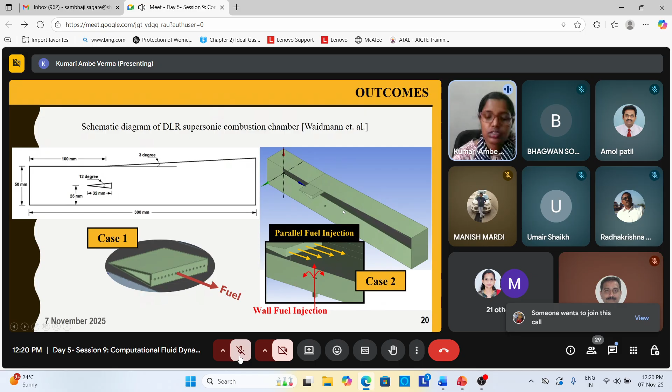Now, go further for the new innovation that you can do with a one-section wall fuel injector. What you did here, you injected fuel from the lower wall. Mixing will take place at the wall boundary, and in the middle also you can utilize it further. So what we will do is plot it again and try to understand the behavior.

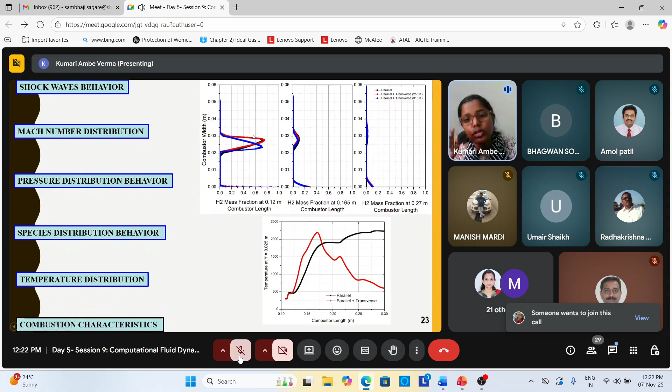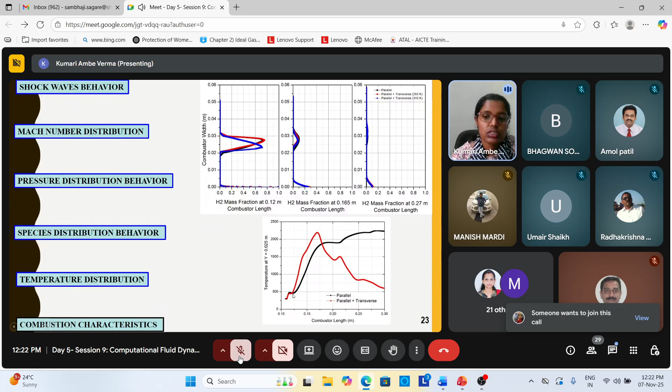But the very important drawback in the parallel fuel injector is the middle strut - that material we cannot utilize twice. Multiple research has been done in France. They claim it is really difficult to keep the middle in a suitable material, and it is not cost effective. So you can see this temperature variation really peaks in the middle part, and it is difficult to manage.

Now talking about the mixing in comparison to the existing one, you can see mixing has taken place a little earlier because of the parallel transverse. But the thing is, performance has dropped - you can see at the end. Mixing has improved, but the performance has dropped. That means the selection of the location was not good.

So what you can do is optimize the injection location and the behavior, how you can change it. That can impact the performance, because we have already claimed the mixing has increased - mixing efficiency has increased. What you will do now is only focus on the combustion efficiency. So you can change multiple variations, multiple length scale variations, multiple locations, and angles you can perform. So multiple optimization techniques have been done here.

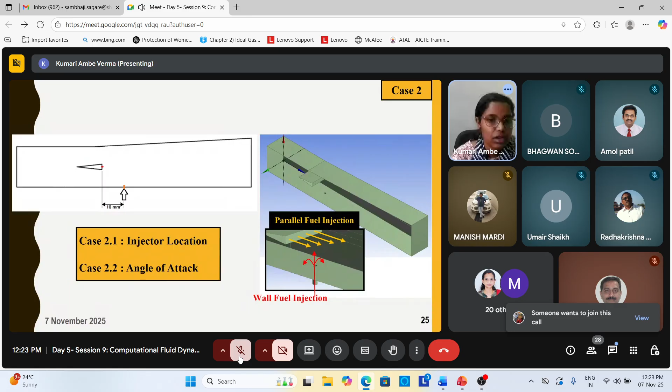So by this you can see, the first one I have changed the location a lot from the combustor. Okay, there is a catch here - you cannot give too much difference in both the fuel injector positions. That will not give you suitable performance characteristics.

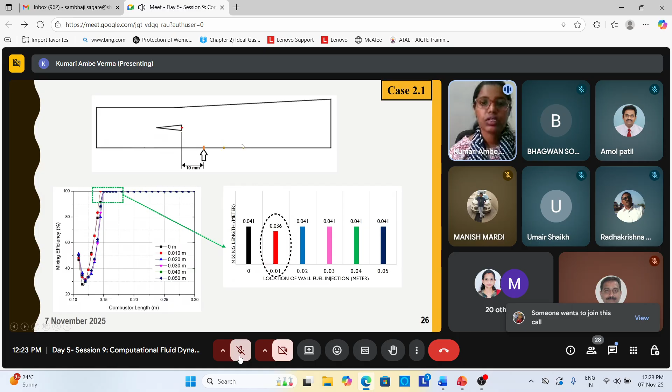You have to focus more on comparison with the existing model, which shows a very high peak of 93.46%. So multiple variations have happened - the mixing location has been changed, the angle can be changed, and the properties of the fuel species can be changed, and you can understand the behavior by doing multiple optimization techniques.

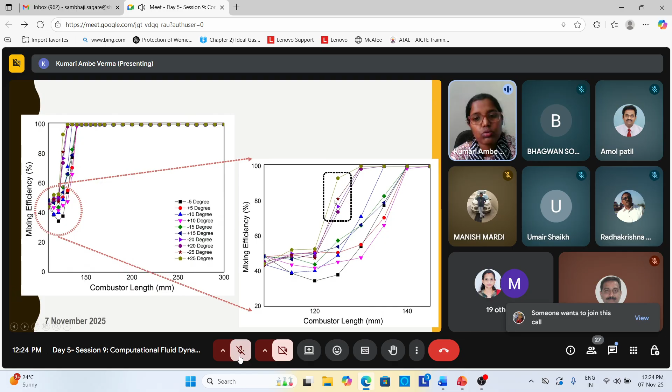It was seen that the mixing nearer to the middle combustor is also playing a major role that can suggest the final outcome. So based on selection of the model and the angle of attack, at the end we have summarized it.

What we have summarized: first we have done the parallel fuel injection strategy simulation, exactly similar to the experimental one. Then we changed certain conditions in the atmosphere. Using hydrogen fuel only, we identified 93.66% combustion efficiency with 0.155 m length scale needed for the minimum mixing. After that, we changed the fuel injection strategy.

One was parallel injection, one was transverse injection. In both cases, you have to be very particular about the pressure at entry. When the flow is at very high speed, very high peak speed, you must understand how it will enter - you cannot just push it. You have to apply pressure at entry, you have to force it. So we did a 3:1 ratio of P transverse versus P parallel.

After that we identified a sudden drop in the combustion, but our positive point was the mixing efficiency length scale had reduced. So further optimization in the location, slot length, degree, and the impact of incoming air, by changing these we saw the efficiency could reach nearer to 95% and up to 130 mm of the combustor.

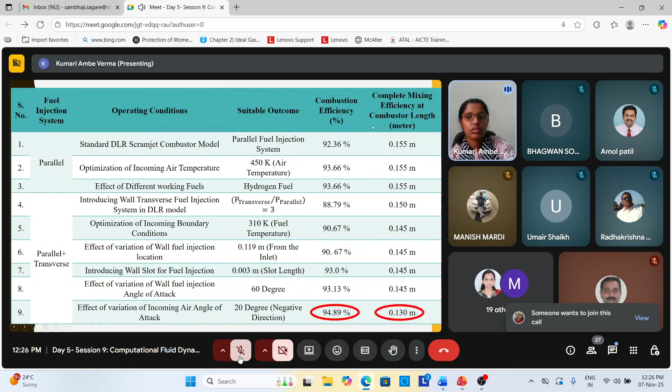So what we identified from the slides is that you have to be particular about the ratio, how you place the location, what dimensions are needed. You cannot keep the fuel entry too big, otherwise the incoming air will block the pathway of the fuel entry. You have to be particular about the slot, otherwise it will also create recirculation inside the slot. You also need to consider the angle of attack - in which angle it will enter and the angle of attack of the incoming air.

So this is the one case study we have discussed, and the software utilized here is ANSYS Fluent for this category. This is one case study in accordance with this slide. This case study 2 you can see combustion and propulsive system categorized for example as a scramjet combustor.

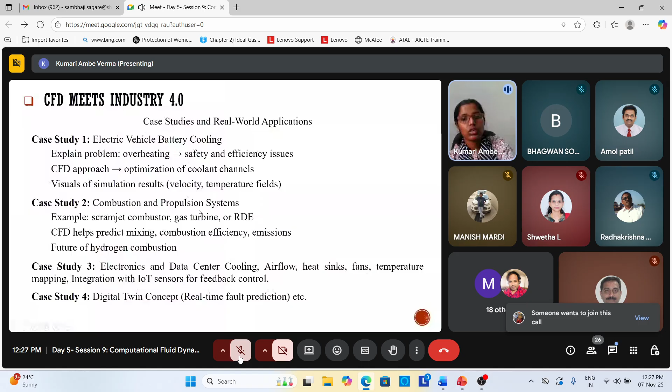So you can search any case study accordingly, understand it, and make a new paper or new research idea and many things. Thank you all.

I have covered all the segments of the basic fundamentals, student-friendly education-based governing equations, what types you need, how to discretize it, and one case study so you can understand what things you can do. You can choose the CFD flow physics based on that. So thank you for the talk.